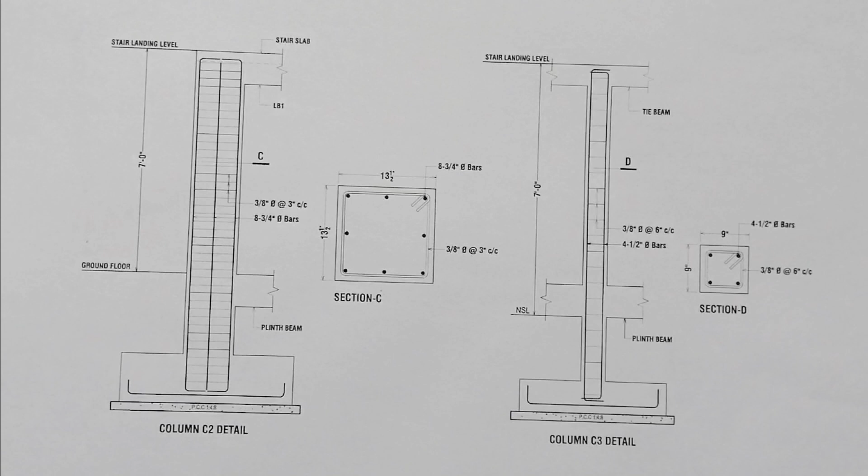Assalamu alaikum beautiful people. Today in this short video lecture I will discuss steel structure drawing for RCC columns. In the previous video I discussed steel structure drawing for footings, three types of footing. But today in this video we will discuss steel structure drawing for two types of RCC column.

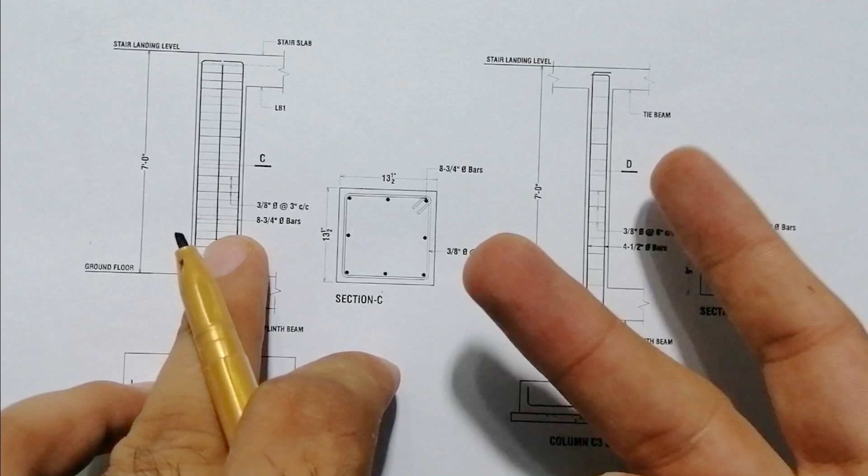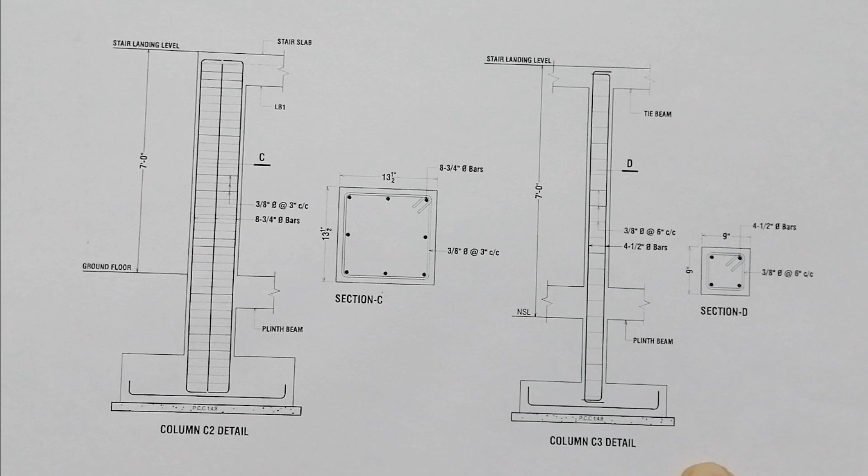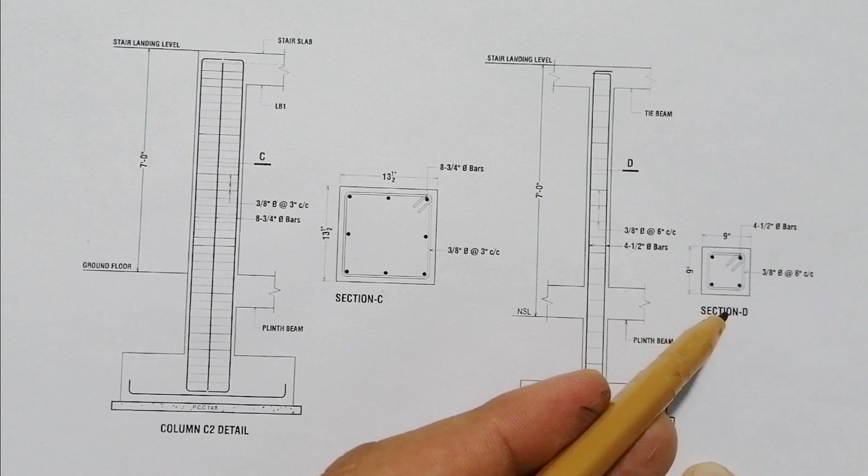Okay, let's start guys. First of all, we have two types of columns here. One is 13.5 inch by 13.5 inch and the second one is 9 inch by 9 inch. These are two types of columns and I will discuss their reinforcement details. The first column can be used from 1 story to 3 story, and this one can be used for 1 to 2 story, but it can also be used for 1 to 4 story.

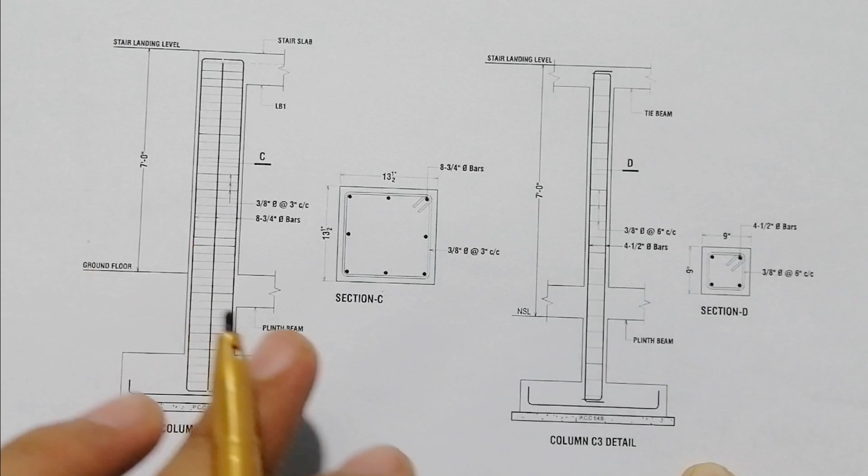I hope it can work, but this is just for domestic buildings, not for commercial buildings. It also depends on the bearing capacity of soil, but here in my city this steel structure can work. Here the first one, the size of the column is 13.5 by 13.5 inches. We have 8 numbers of steel bars, 1 2 3 4 5 6 7 8, which dia is 6 number, 6 suture.

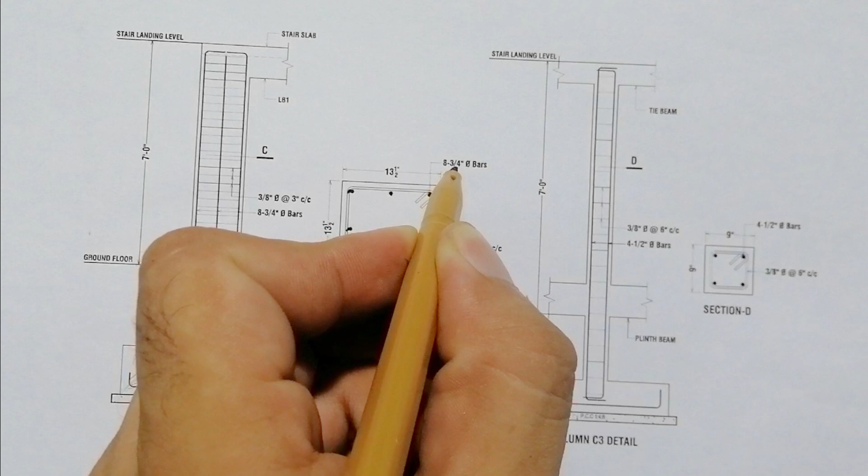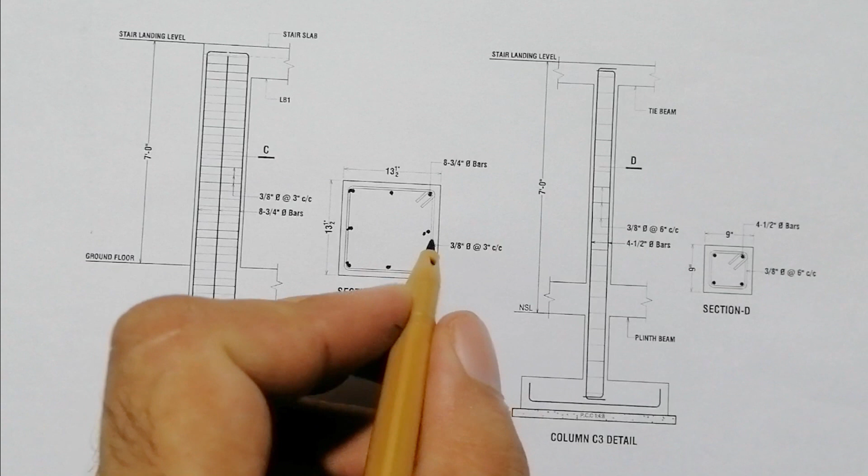This is 6 suture, it means 20 millimeter. 20 millimeter dia of steel bar is 6 number. Total pieces we have 8 numbers and 6 number bar we used here. Now come to its lateral tie dia, which is 3 number bar, so it becomes about 10 millimeter. And with the spacing, you can see the spacing of 3 inches.

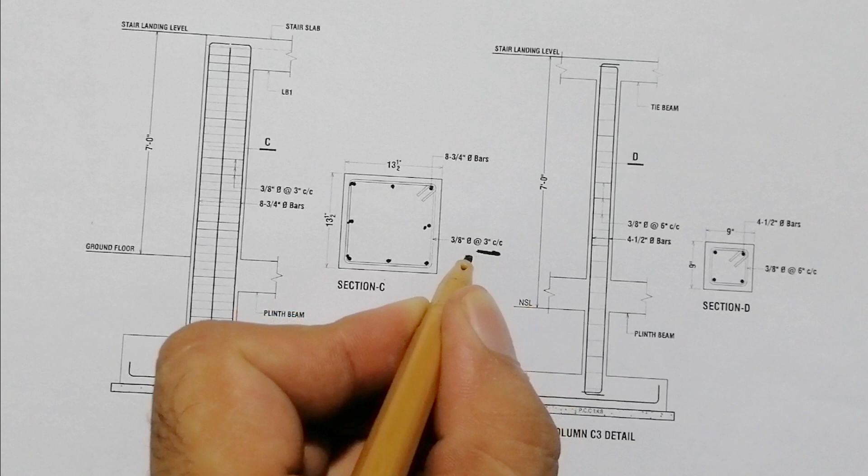3 by 8. Okay, and the spacing is 3 inches, as you can see here. Lateral tie spacing is 3 inches, and we have 3 number dia of steel bar as lateral tie. And you can see the hooks. The hooks should not be less than 3 inches, or you can use the formula 9D, where D is dia of steel bar. So this is the first column, and as you can see, its section.

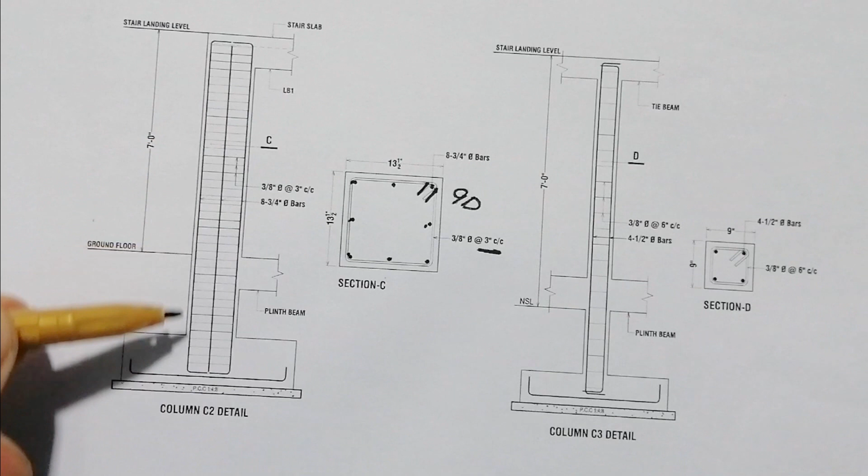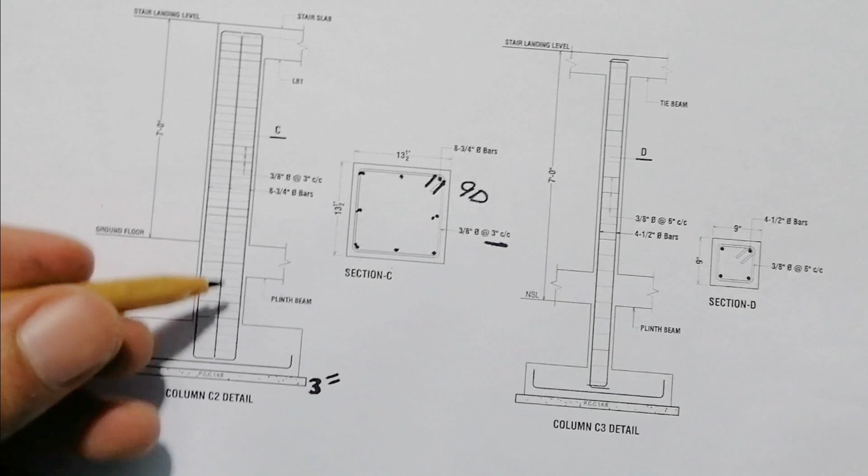This is the column C2 details, and at the bottom we have PCC, which ratio is 1:4:8, which thickness is 3 inches. In the previous video I discussed its details, its measurement, its steel reinforcement details. You can see here, this is just 12 inches, after this 3 inches. Now you can see this is the plinth beam and this is ground floor after the plinth level.

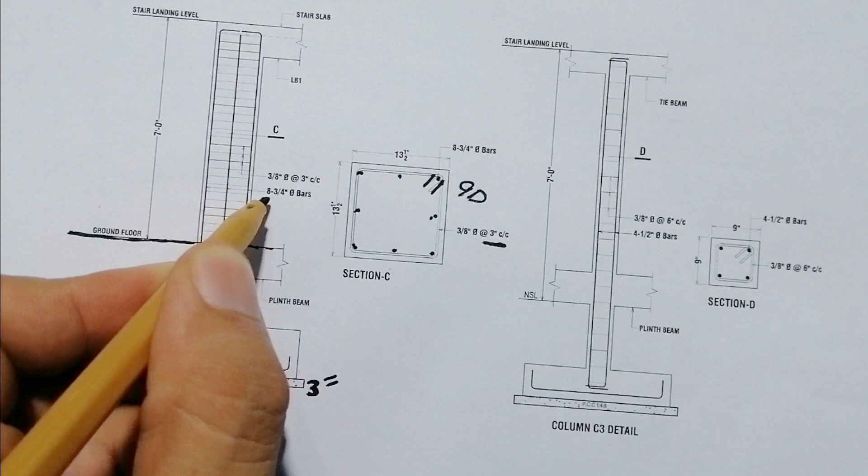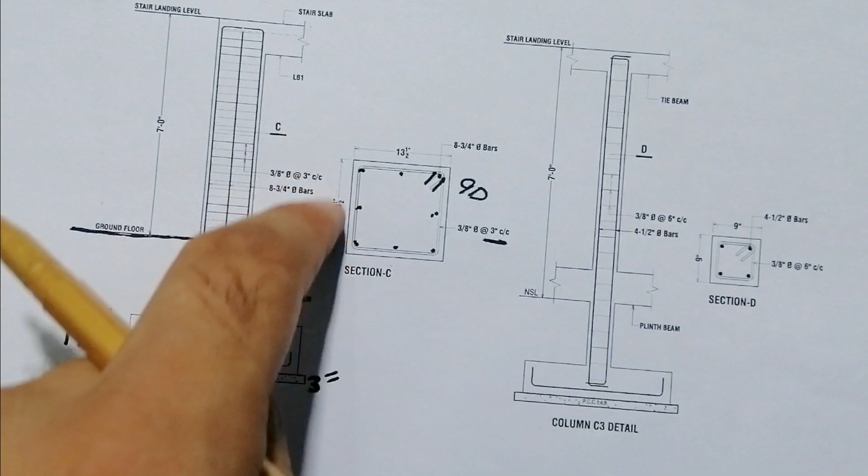Now you can see its reinforcement details again. In this section we used 8 numbers of steel bars, which dia is 6 number or 6 suture, and lateral tie dia is 10 millimeter or 3 number, with the spacing of 3 inches, because this is a multi-story building. I saw many people using lateral tie spacing of 10 inches, sometimes 12 inches, sometimes 14 inches. It's wrong. It cannot support the structure load because it can make shears in the column.

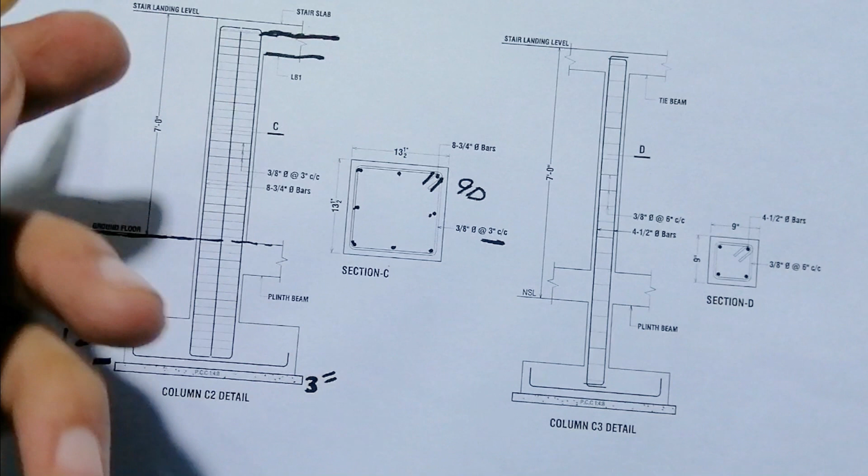Here at the top, this is the stair slab. This is the beam here, and above the beam you can see this is slab. So this is the first column. Now this is the second column, which size is 9 by 9 inches. We used here 4 numbers of steel bars, and 1 by 2 means half inch. Half inch means 12 millimeter steel bar.

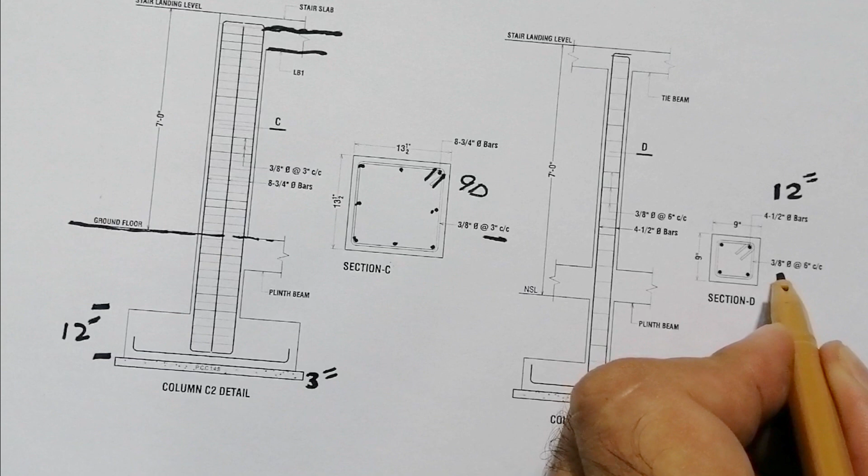We can see 4 numbers, and dia is 4 suture, or half inch. Its lateral tie is 3 suture with the spacing of 6 inches. Here 3 inches, and here 6 inches because the size is 9 by 9 inches, and here the size is 13.5 by 13.5 inches. Now come to the column details. Here the PCC work is 1:4:8, and its reinforcement details and the footing I've already discussed in the previous video.

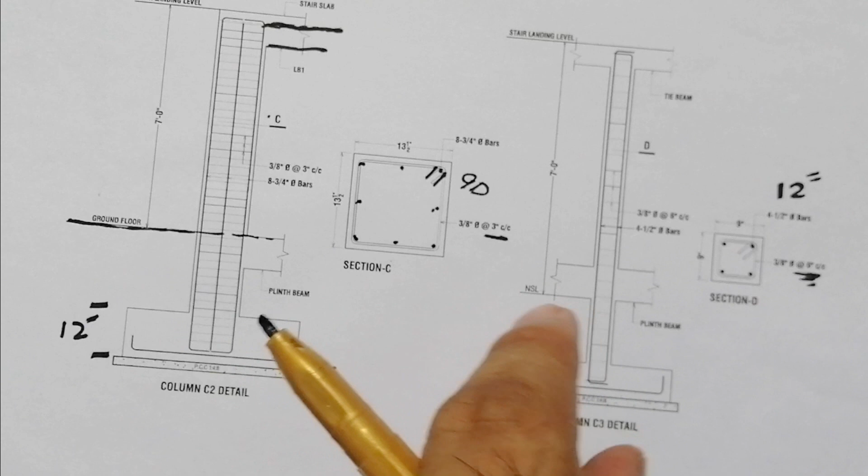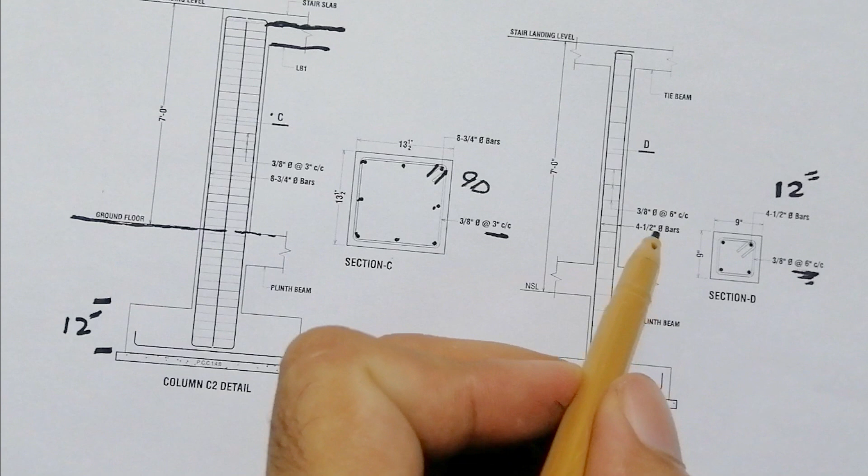This is the plinth beam, this is NSL, natural surface level. From the natural surface level the total height is just 7 feet. This is just used for the stair landing level. And this is the tie beam, etc. Here also we used 4 numbers of 1/2 inch dia bar, and 3/8 inch is the dia of lateral tie, with the spacing of 6 inches.

So this is a short video, and I've discussed the front view, reinforcement details or steel structure drawing, and how to read it for the column.